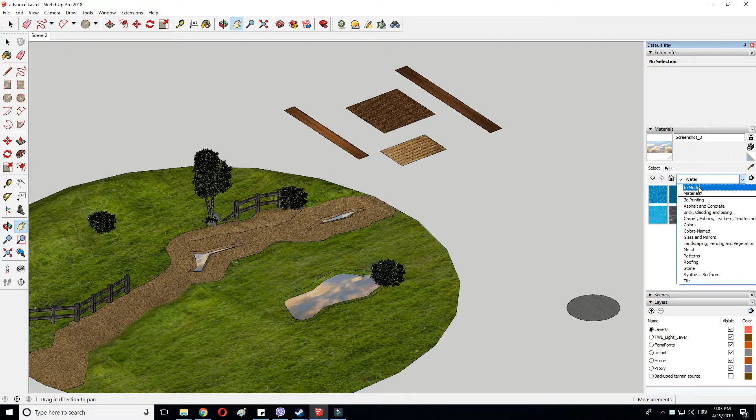In today's episode we're going to make a medieval cart. It's going to be a wooden cart with two wheels and a complete wood construction. I'm going to try to keep it simple and hopefully useful.

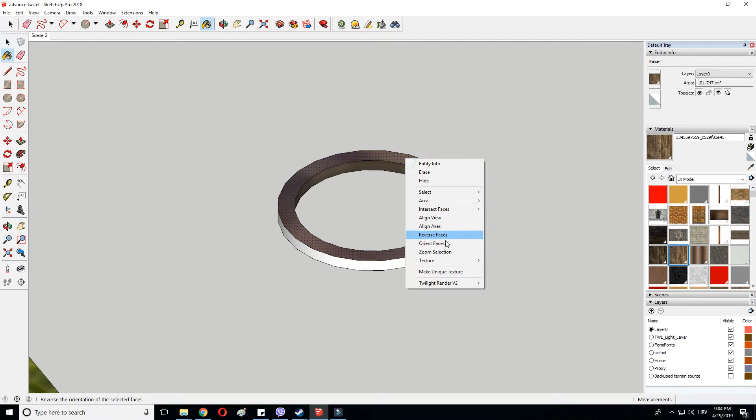The first part I would like to begin with is the wheels. Creating two little circles, deleting one, and voila, we got our circular shape. We're going to color that in a moment. I'm just going to use this wooden color, right click, texture position, reducing the size of the texture. It can be a neat little detail sometimes.

Okay guys, so hop in. Now we're going to use this texture, the seamed metal, and we're going to put it on the outside, and rim it a little bit with the same seamed metal for a teeny tiny bit of extra detail.

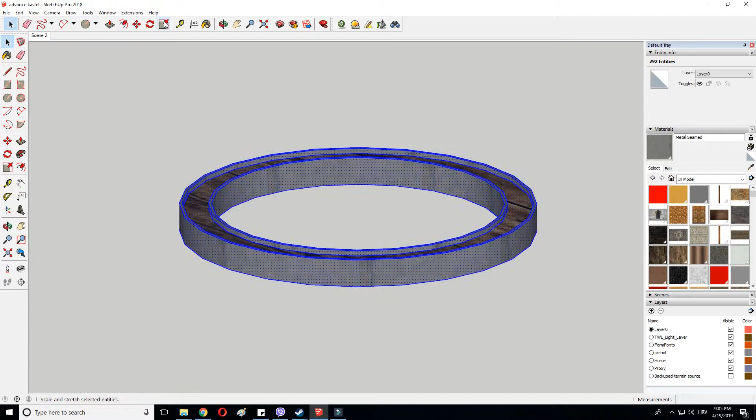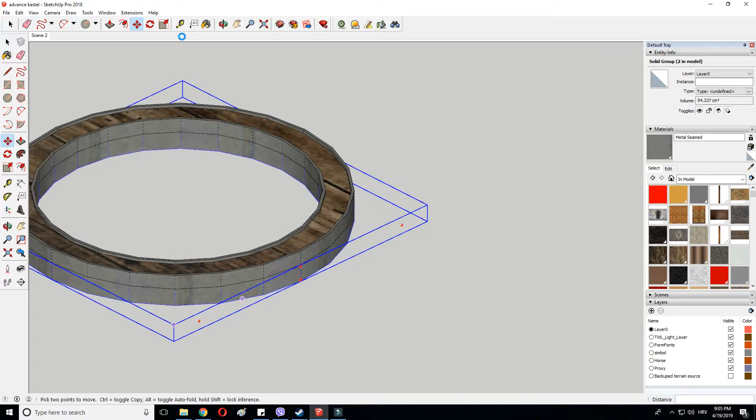Now you're asking yourself, what about the other side? Well, that's easily fixed. We create this as a group, we copy it, we scale it the other way, which is going to be tougher than I imagined. Okay, and yeah, there we go. Now we have the wheel.

So it's a good idea to just explode this, find the center, close it off, and there we go. So the outside part of the wheel is done and done. But now comes the inside part.

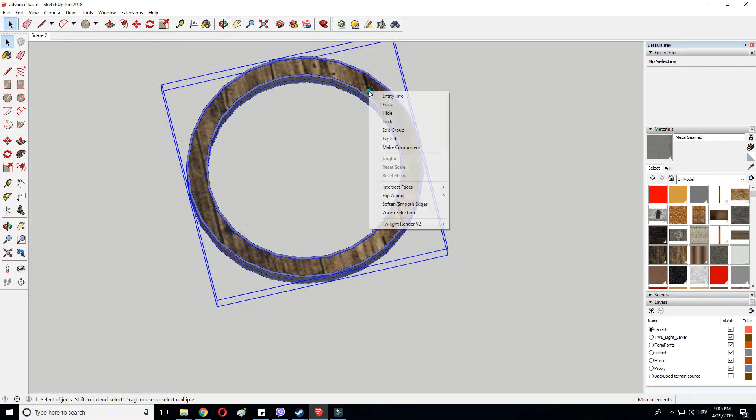So the spokes. Creating a circle around here, we have a chance to create this. Now let's see, now we're going to just reduce the geometry of this a little bit. Going to try to do this.

Okay, this was a bit clumsy. Poof, never mind. I missed some of my plugins because I just switched to Windows 10, so I'll have a lot to do there. But let's just go with this shape, it's going to work out.

Okay, and we're going to make it wood, just like the outside. And voila, now we're just going to stretch it a little bit, and up to this point, and the lower point up to this. Perfect. Okay, now comes the fancy part.

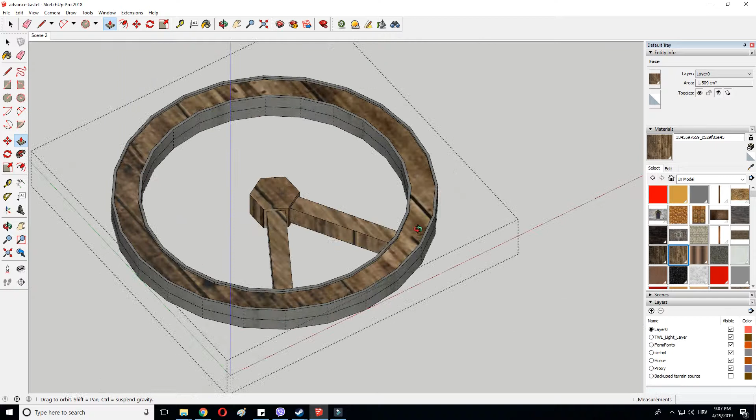So now comes the fancy part. We just drag these little squares here, and we drag them out. Oops, forgot this little bad boy here. They do not have to be perfect, but they're gonna do the job.

There we go. And now you could, of course, adjust the texture a little bit. It's going to help the believability of the whole model. It's just going to look neat, and you'll have paid attention.

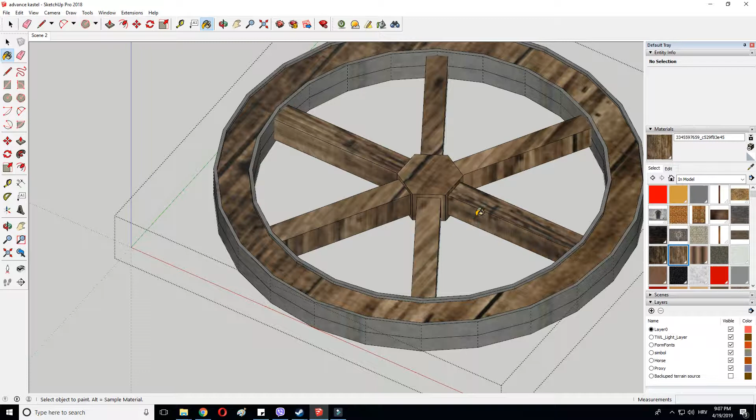People love that. So you just repeat this for at least these parts here, so you can select them. And when you select all of these, you can paint them in the correct texture. And that's it, and just this part more. I am admittedly detailing here, especially for what I want to use the model for, but never mind that, it's working.

So after fiddling around a little bit, sometimes I'm a little bit sad that I do not edit these videos at all, so I'm just doing these on the top of my head, which makes some of my commentary a bit silly, but hey, who cares? We are here for the fun.

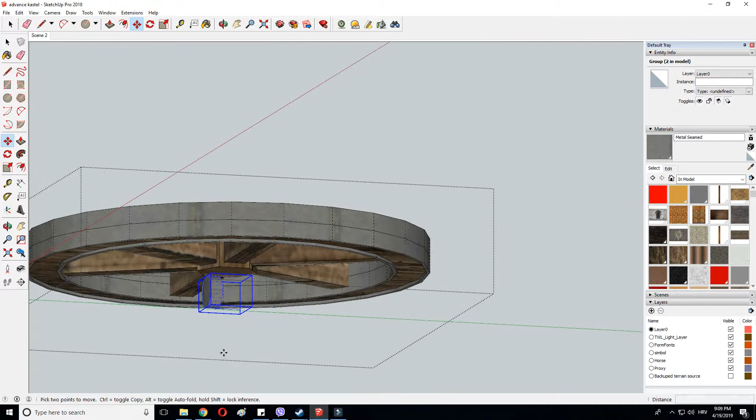So let's make these pegs out of metal. Okay, this bad boy is heavy metal as of this moment.

Now, once these pegs were crafted, we're going to copy at least one of them, paste it here. Okay, just put it down there. It's going to be a nice little resource, and we're going to copy this beam. So this is going to be our special friend.

We're going to turn it into a little group, and we're going to use that group, resize it, and well, do whatever is necessary to bring about a believable cart, a medieval cart.

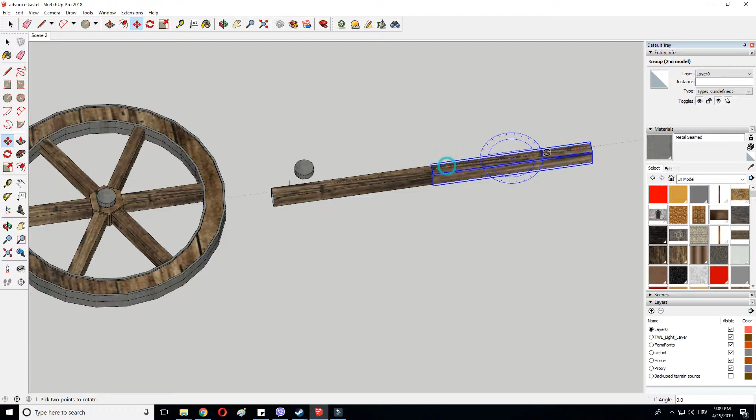So we're just going to extend it a little bit, copy it here at this point, group them together, turn the wheel up, so here this peg isn't touching the surface, and there we go.

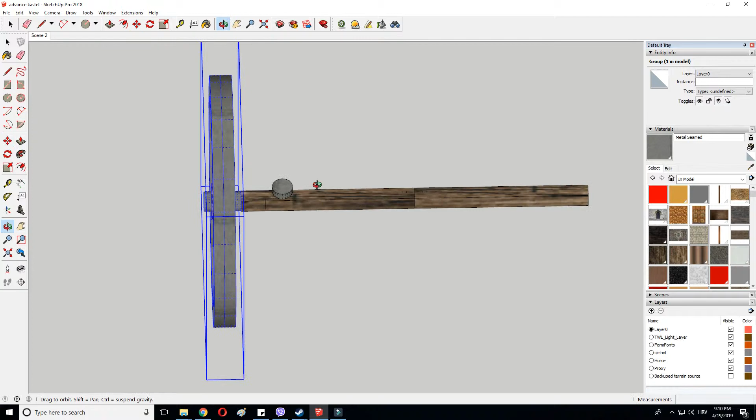Now we are in business. So the first surface, pardon me, we're not yet even close to a surface, but the wheels are done. So now we are pulling in a few other nice things.

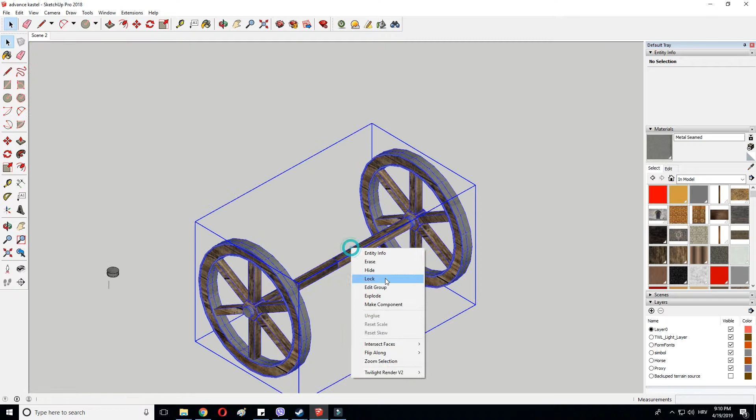So we're going to create a frame. The frame is going to be the easy part, because we're just rehashing what we already have. So this and this bad boy, you know, sometimes you should switch them up a little bit for variety's sake.

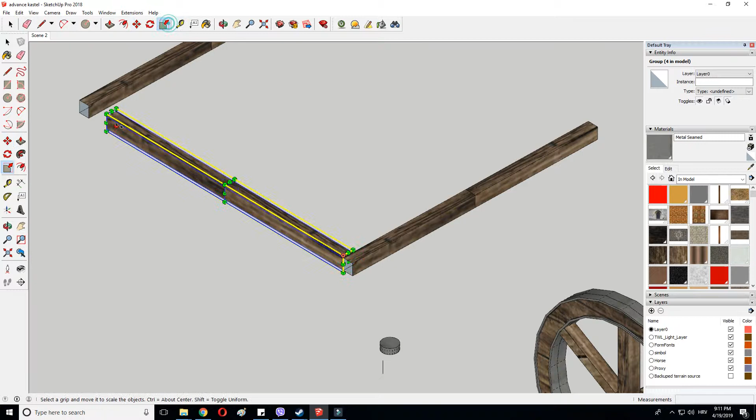Okay, it's gonna take a while to adjust these perfectly. There we go. Excellent. Now a little bit of medieval imperfections here and there. So this is our frame.

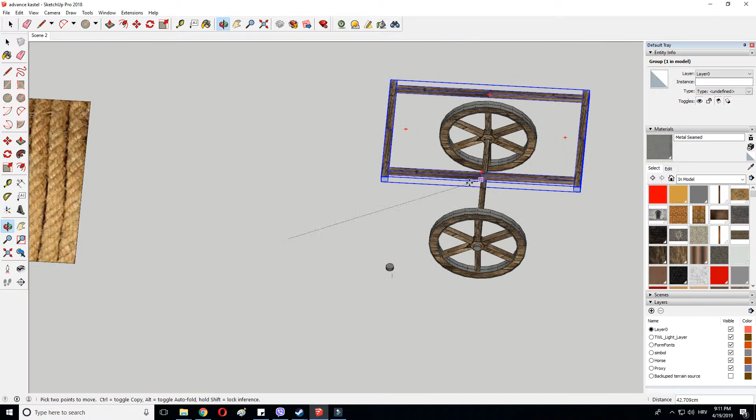Now the good part with the frame is that we can extend it, which we're going to do, and we're going to put it right here. As you can see, the frame is fitting nicely, and these wheels are a bit big, so this frame can be extended quite a bit and moved to the middle.

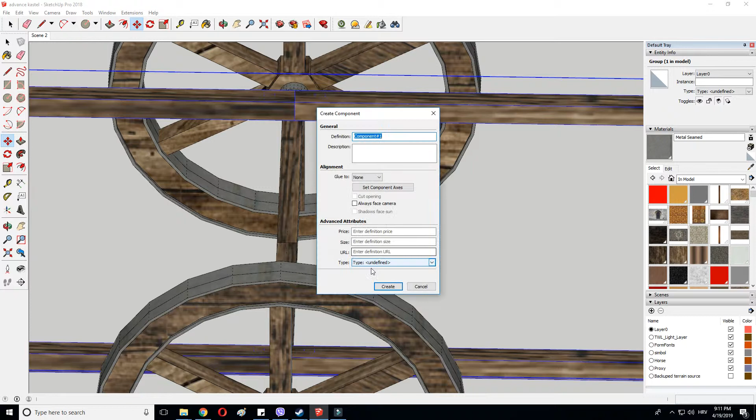Now we're going to make this into a component. We're going to call it flatbed. Because I would like to edit this component, we're going to take these two, copy them, edit the component, and oopsie, pardon me. So we're gonna edit the component with these.

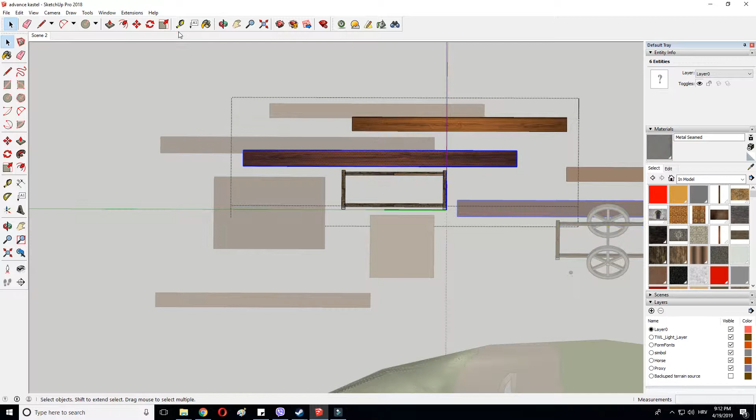Now we have two different textures for our floor, which is great. Now I just need to adjust them a little bit to make them better. Okay, we're not gonna touch them now. Okay, we're going to select these, and I'm frankly going to try to adjust the texture a little bit.

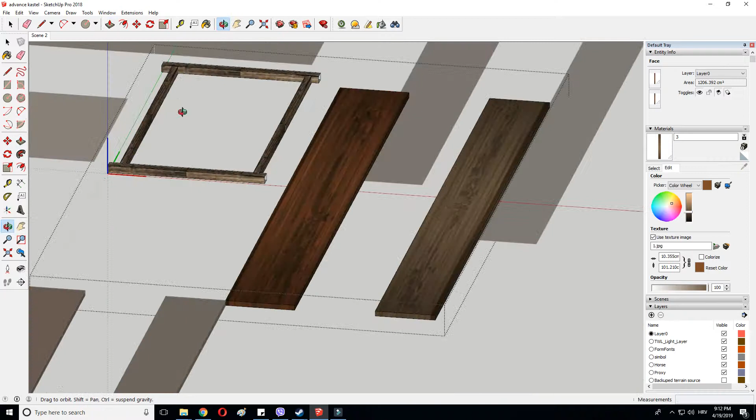Okay, very nice. So let's make these a bit thicker. Turn them into a group, well, two groups, separate groups, and reduce their size until they fit the size of the cart.

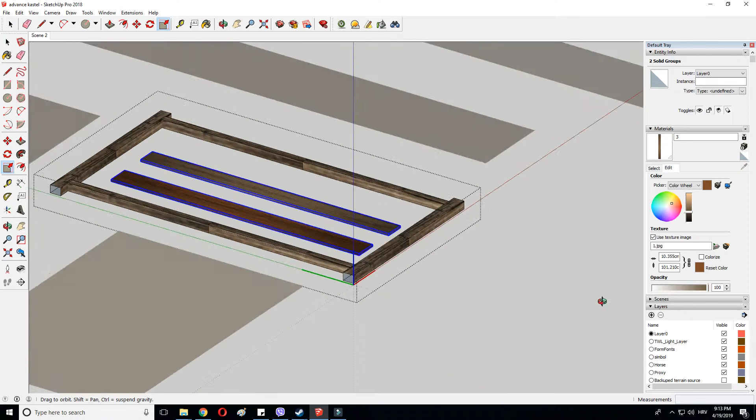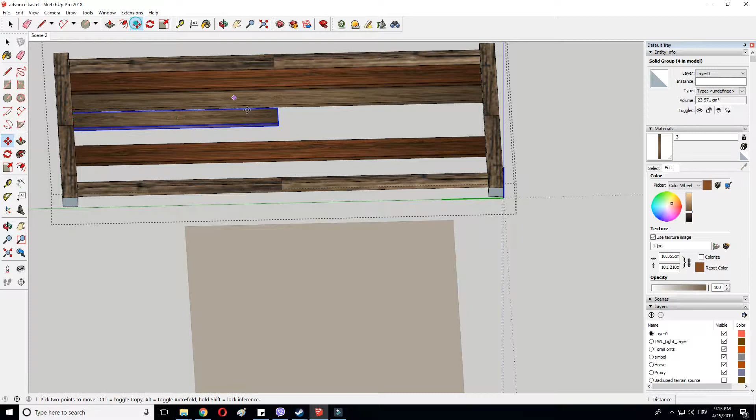And there we go. Now we just switch them up a little bit. For example, this one will be kinda broken in half. So adding a bit more detail to the whole thing. There we go.

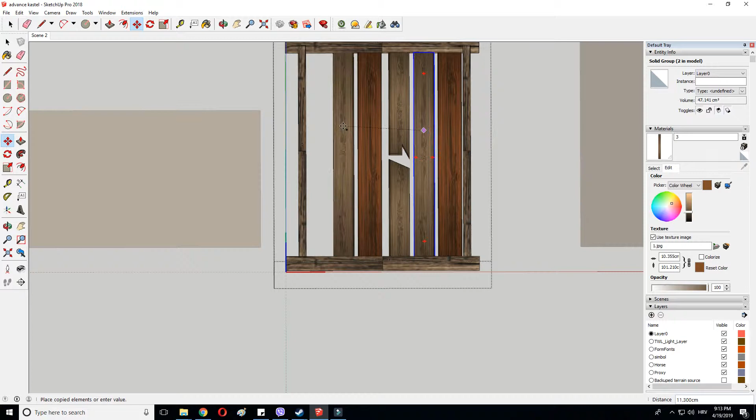And voila, I think the flatbed is complete. Now let's add a few more details. We're going to edit the component, copy this over here. Ooh wee.

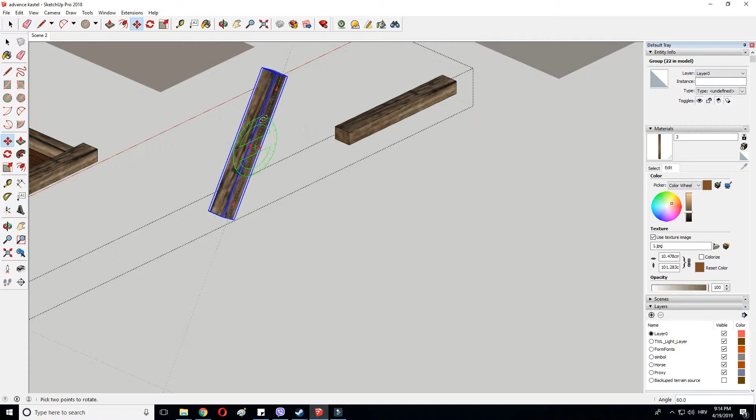Now we're going to align these diagonally next to one another, and we're going to give this bad boy one of these. So there are a few of these missing here and there. I'm gonna find them and add them.

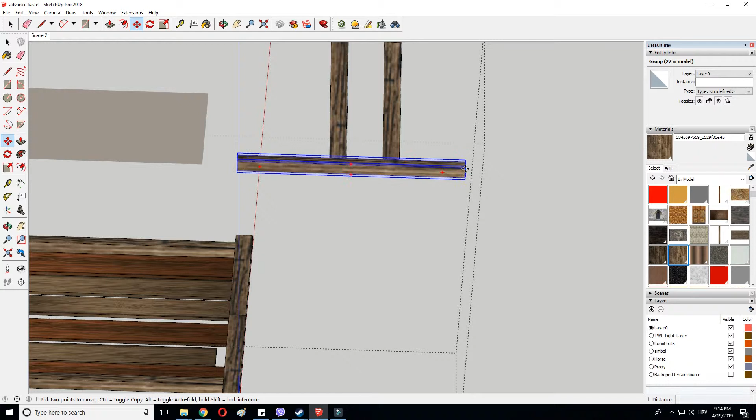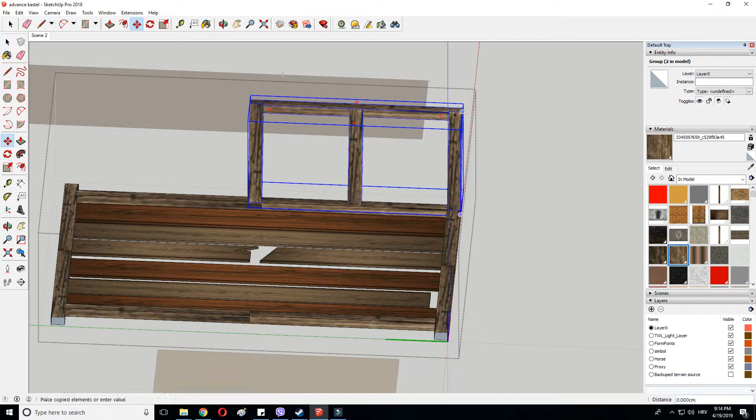Okay, and now we're going to talk a little bit about variation. So for our first cart, it's going to have this sort of sides. Right. I'm not really sure how to call this. I'm not an expert on medieval cart terminology, but we're just going to make them look like this.

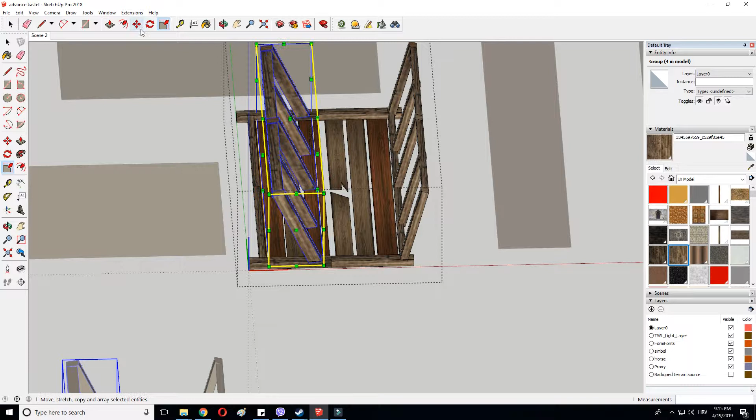So turning it into a group, and voila, we got ourselves a little cart. Okay, this could have been copied better.

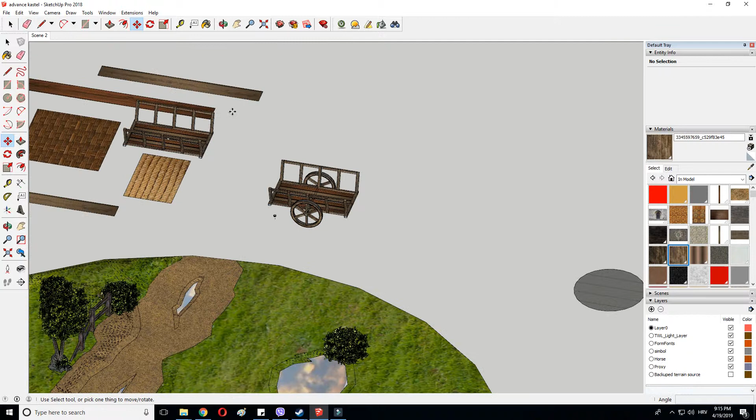Alright, well, this cart is already looking fantastic. So we just need one more little detail.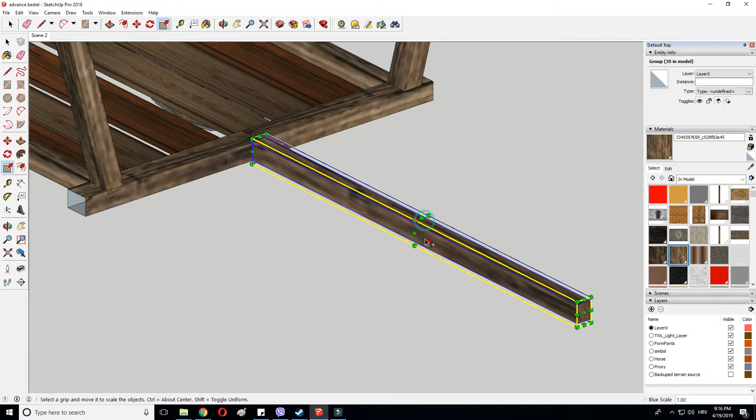So certainly some animal might have been pulling this cart at some point. Now again, I'm not an expert in cart anatomy, so we're just going to play a little bit with reality. I've seen carts worse than this one, or at least, less believable ones. They were certainly pretty ones. Okay.

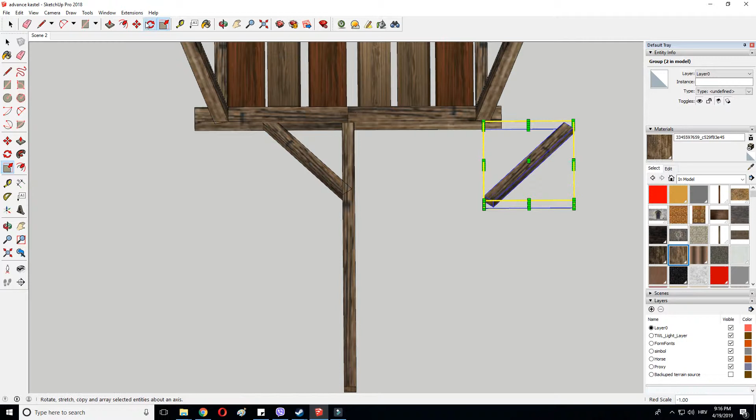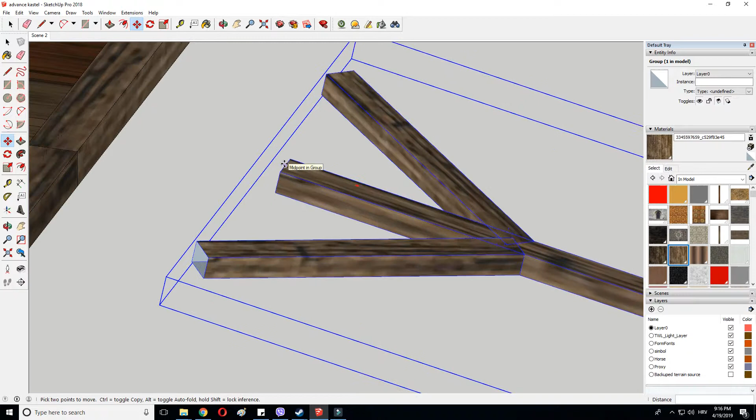So... aha, perfect. And just adjusting this little piece, putting it in the middle, pardon me. And what I'm going to do is I'm going to just rotate all of this and firstly put it here and then push it down there. Ta-da! So this wasn't really needed so far.

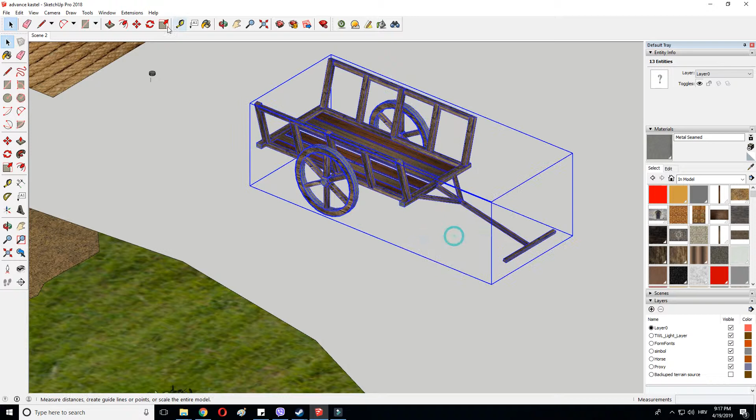So here we have our cart. So I'm just going to add a few of these details, though they're not necessary. Okay, we're going to put this here and we're going to fix it up.

Okay, now a few more adjustments because I want to do a render here, and of course these wheels are going to be handled as well. We're going to give this one, this seamed metal, just a little bit of shine, steel, SketchUp. But this is okay, we're just gonna keep this shininess. And voila, the cart is ready.

Now we just need to scale it in order to fit it into the scene. And I also noticed that these wheels could be standing a bit farther apart. It doesn't hurt them one little bit.

So where shall we place you, Mr. Cart? Oh, by the little pond. How neat. So this cart is going to go here. I'm just going to put this away, and all of these little details are going away because they could harm our scene.

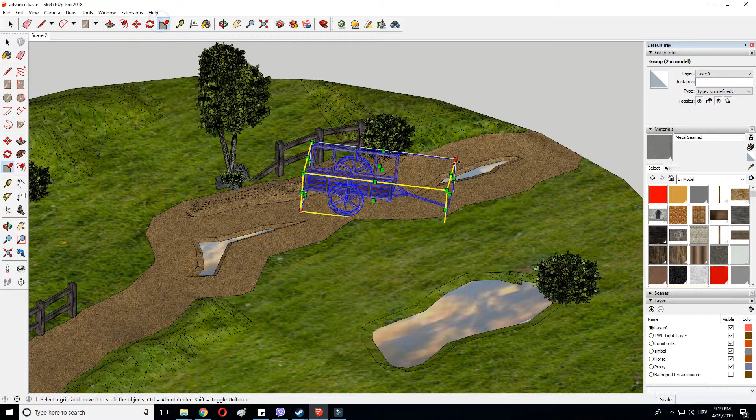And a little bit more skewing here, and I think this is, well, not completely it, but it does the job quite well. So let's increase the size of the cart one more time.

Wow, this looks great. So we're gonna put it here. Great. And I really like the look of this. So let's just give it a larger size so that it's a bit more prominent.

And yeah, let's render this scene. Okay. So I hope this is going to go fast. Again, I am winging it. Pardon me.

Ah, there we go. So now this is the part where we can play some relaxing music while we wait for the render to finish.